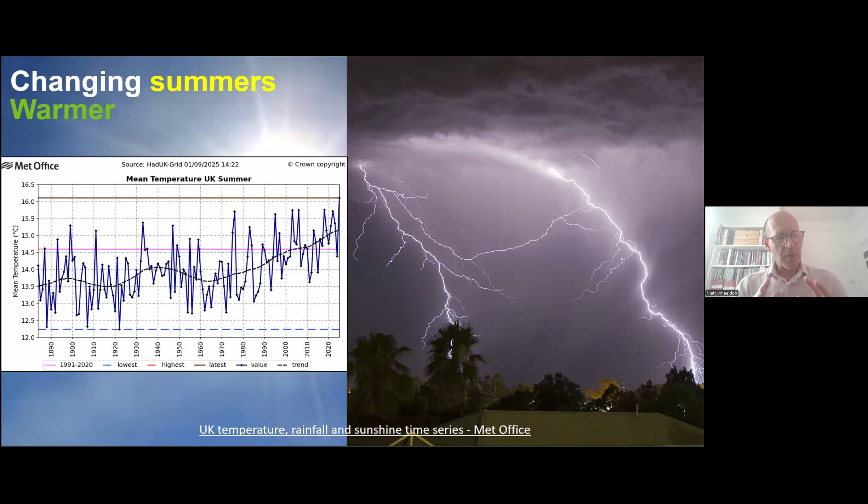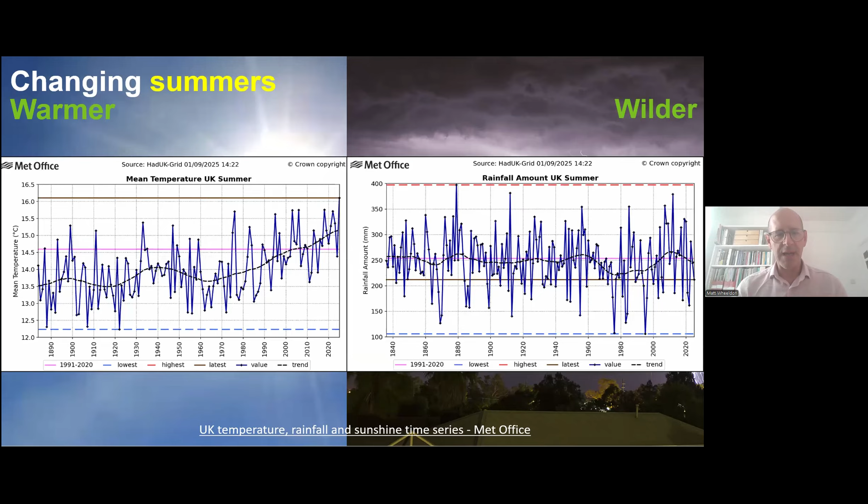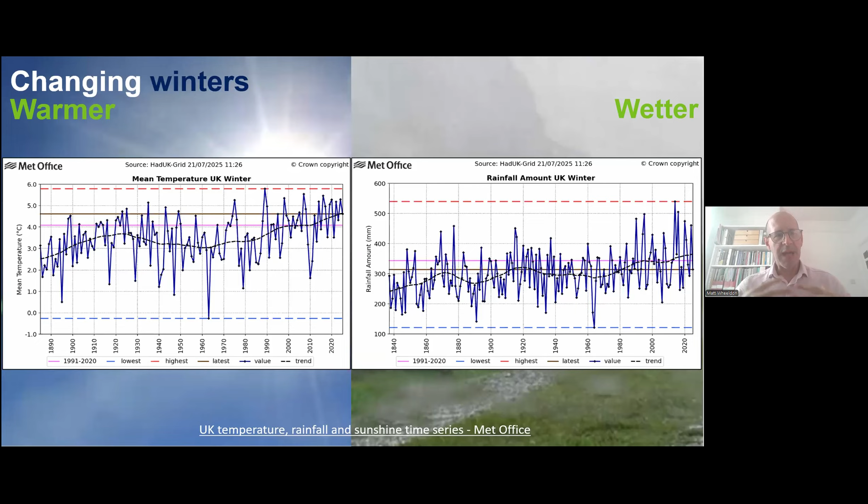Now, a warmer summer doesn't necessarily mean a wetter summer, but it does mean a wilder summer. So the actual amount of rainfall in the summer is not necessarily increasing, but when it does rain, boy, does it rain much harder. And that's typical of a more tropical climate. Our winters are also getting warmer, and they are getting much wetter. And if we add summer, winter, spring, and autumn together, it looks a bit like this. So over the past 50 years, the mean temperature in the UK has increased by 1.4 degrees.

There's a thing called the Clausius-Clapeyron relationship, which talks about the relationship between air temperature and the amount of moisture it can contain. And it says that every 1 degree the atmosphere warms, it can hold 6 to 7% more moisture. And that's exactly what we've seen. Over the past 50 years, rainfall has increased by about 150 millimetres on average across the UK. So we're getting warmer years, we're getting wilder summers, we're getting wetter winters.

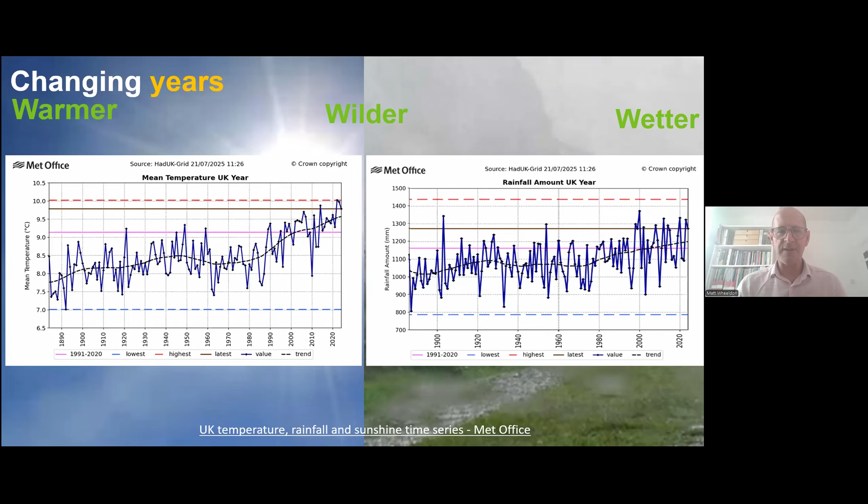So how we manage rain has got to change, because we're moving from a climate of drizzle to one of drought and then deluge. And so the assets that we build now, when we build new homes, have to reflect what the climate is going to be like in another 50 years. And if you look at the rate of change of those graphs in front of you and you project forward another 50 years, we're going to be in a very, very different environment. Not only because the climate is changing, but because we're also intervening with the climate through development.

And you're probably aware of the housing growth targets for both Dorset and BCP. Human beings need to live under things that are impermeable. However, what happens to that runoff is really, really important, and not always particularly well managed, which I'll come on to in a bit. So here's the crazy thing.

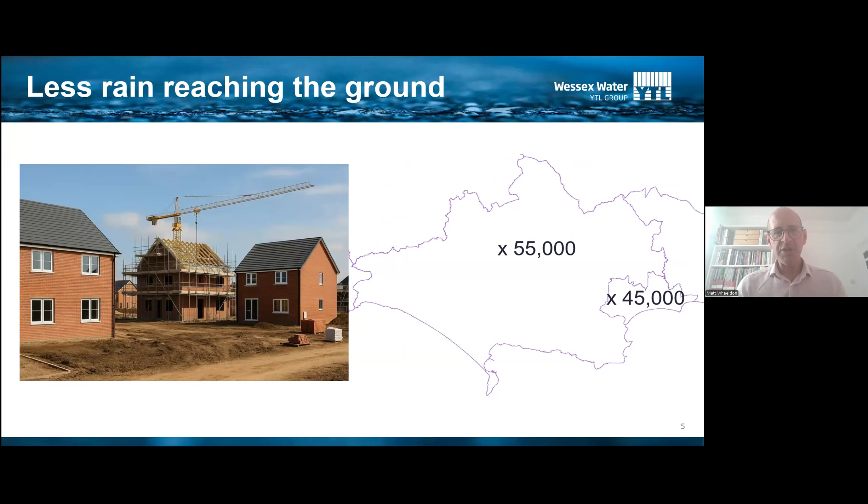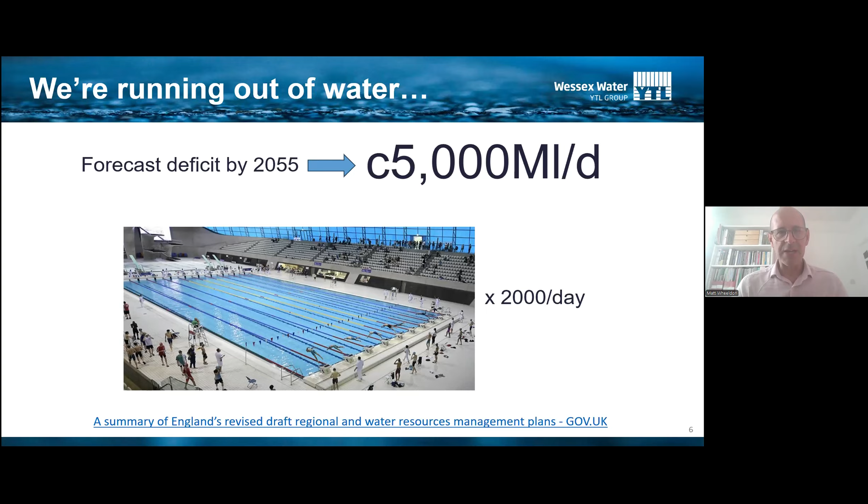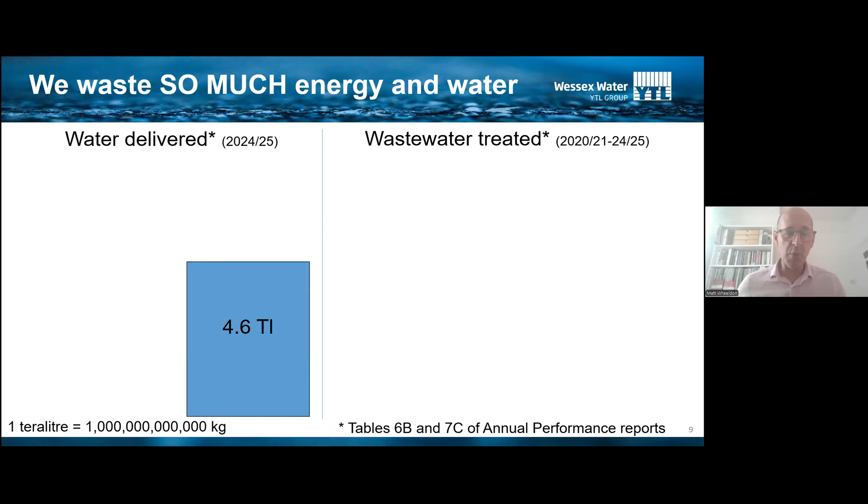In England last year, we supplied 4.6 cubic kilometres of drinking water to our customers. Now, you probably don't hear about cubic kilometres much. We don't generally work in teralitres, but a teralitre is 1,000 billion kilograms. That's quite heavy. It's even heavier when you have to lift it about 100 meters in the air. And that's roughly what we're doing to get the water to your tap. In Wessex, it's about 130 meters to get the water from the source to your tap.

Now, one of the crazy things is about a quarter of that huge amount of energy is wasted, in that we are providing high quality drinking water for non-potable purposes like flushing toilets or watering gardens. If I try and contextualize how much energy that is for a person, that's the equivalent of 1 kilogram, so a bag of sugar, lifted twice the height of Mount Everest per person per day. That's how much energy we put in getting drinking water to your taps and your toilets. That's a huge amount of energy.

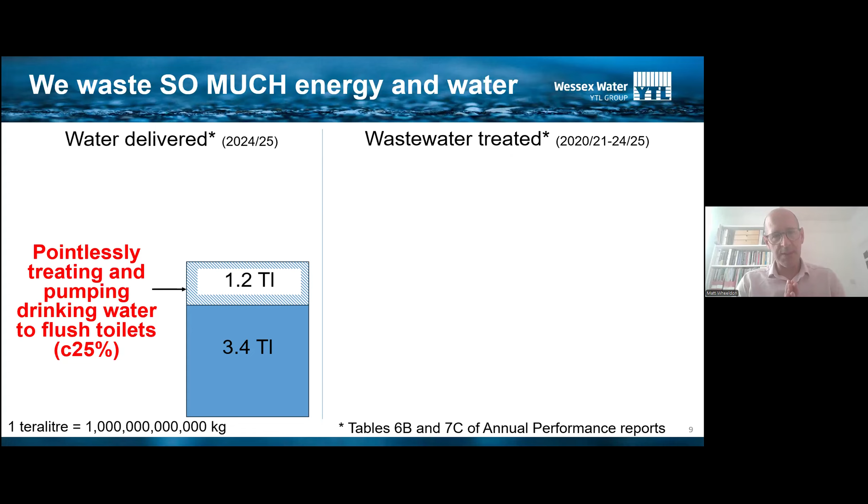On the wastewater side, obviously, we take everything back. And because of the way our system has been built, a lot of rain is also added. About 50 to 80% more liquid on the wastewater side of the business than on the supply side of the business.

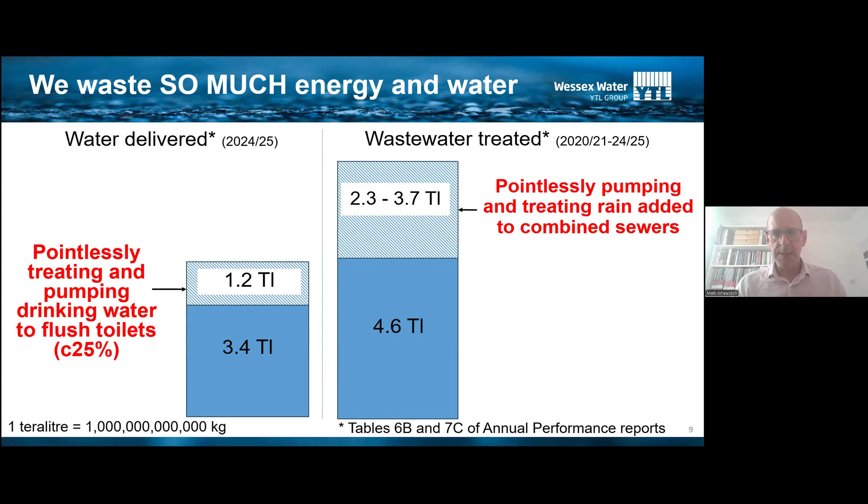These are England figures, by the way, not Wessex Water figures. And that's completely pointless, treating all this extra rain that has been added to the combined sewers. We're not really focused on where the problem is. The problem is the way our homes have been built and are being built. We fill our toilet systems with drinking water and we add rain to sewage.

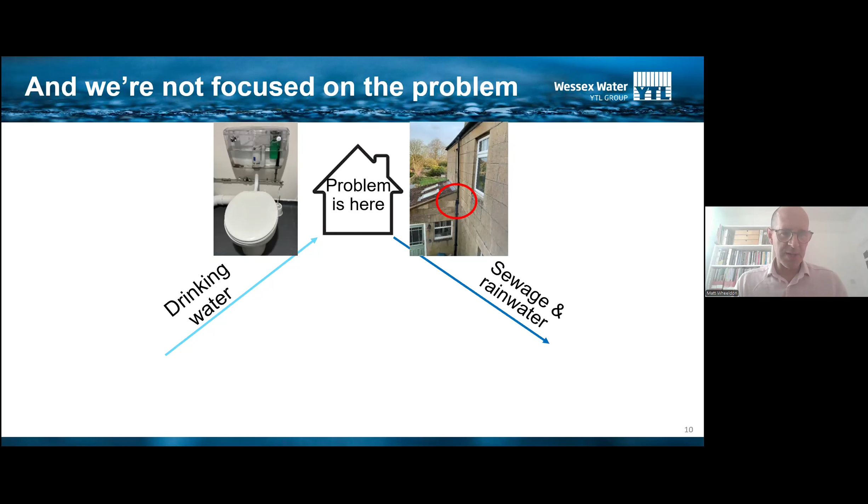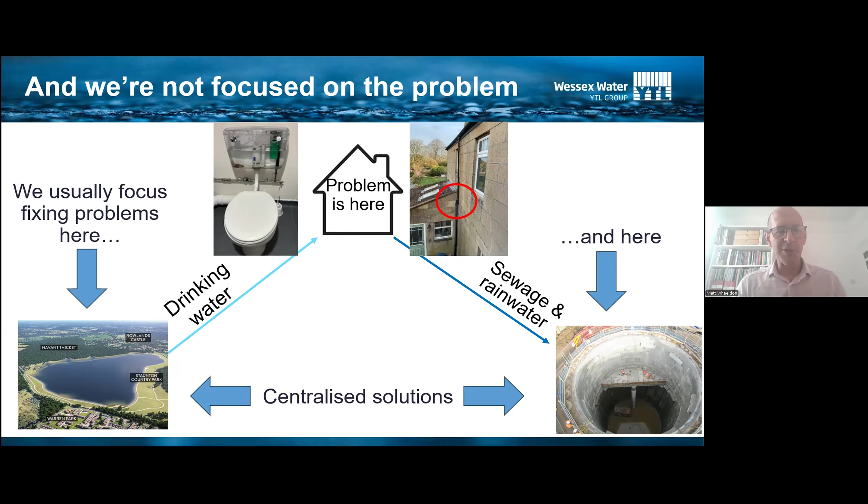And one of the things that I'm trying to point out to people is that the solutions that are typical to try and address running out of water and having too much rain are centralized solutions. So people focus on building big reservoirs, there's lots going, strategic resource options, and also focus on too much water in the sewers by building huge storage tanks. Now, these centralized solutions mean that we end up storing, treating, pumping and treating more. And centralized solutions have a massive, massive energy cost.

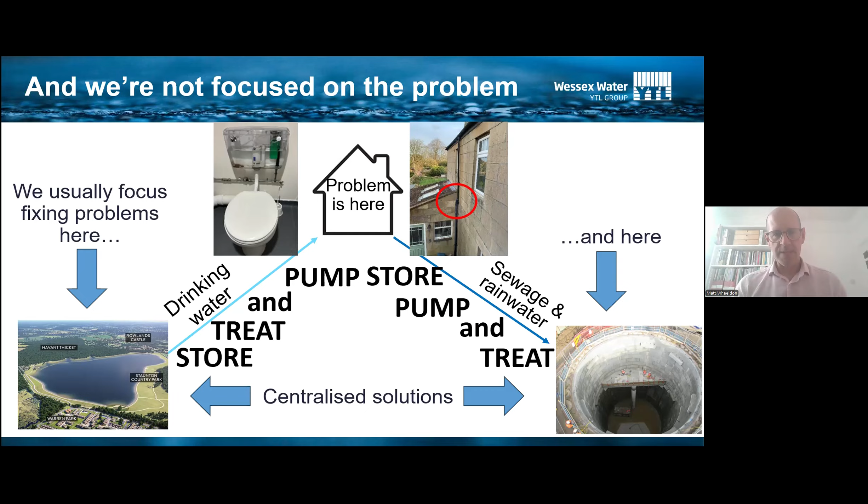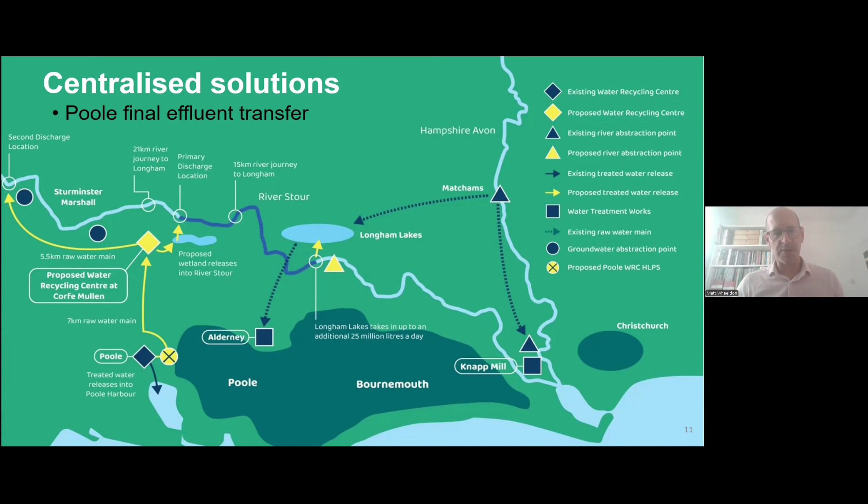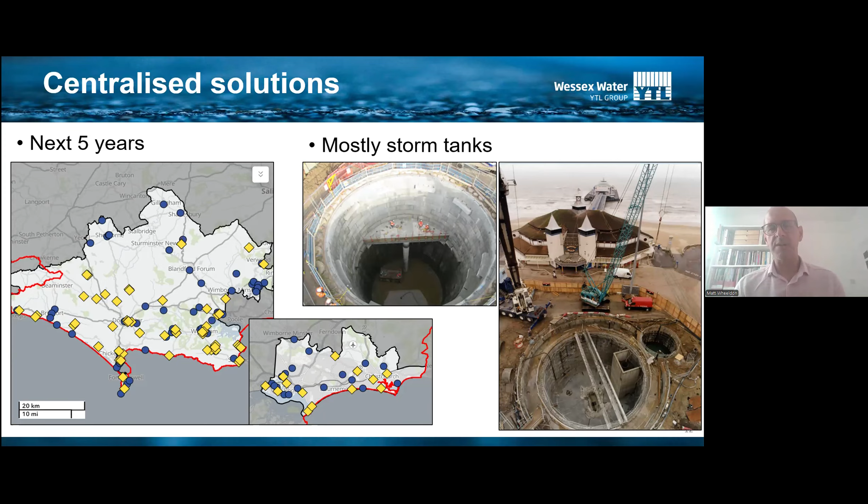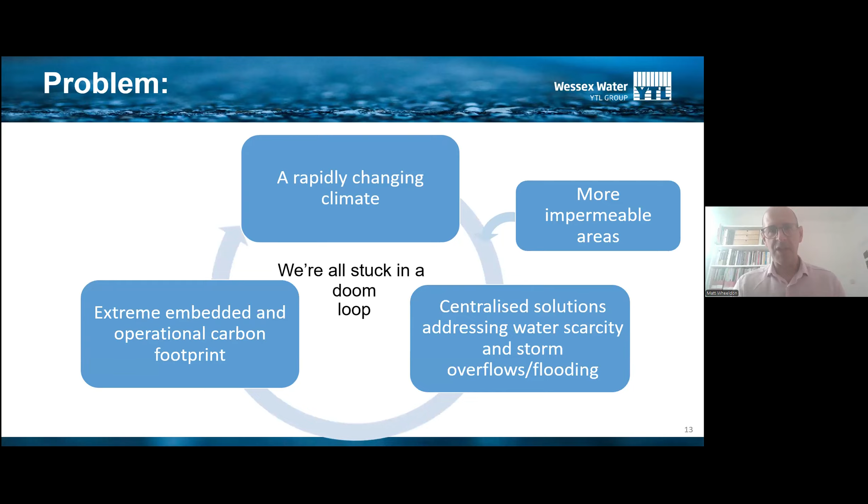Now, the problem we are building is we're stuck in this doom loop of a rapidly changing climate, more impermeable areas being built, centralized solutions to address water scarcity and storm overflows and flooding, which all have extreme embedded and operational carbon footprints, creating a rapidly changing climate. So the $64 million question is this: how can 100,000 new properties in Dorset and BCP be more sustainable? Well, the answer actually is quite straightforward if we harness and mimic nature.

And to do that, there are two simple principles that are documented in a document that DEFRA have written, which are called the Rainwater Management Principles. And these are really quite straightforward. Rain is first and foremost a resource. We should capture it near where it lands and use it where possible. We don't. We build homes that don't do that. Rainwater should be returned to the environment as close to where it landed as possible and never mix with sewage.

Historically, we haven't done that. And even today, we don't put it close to where it landed. It doesn't get mixed with sewage by developers anymore, well, in most cases, but we don't necessarily put it as close to where it landed. In simple words, we need to manage rain better where it lands.

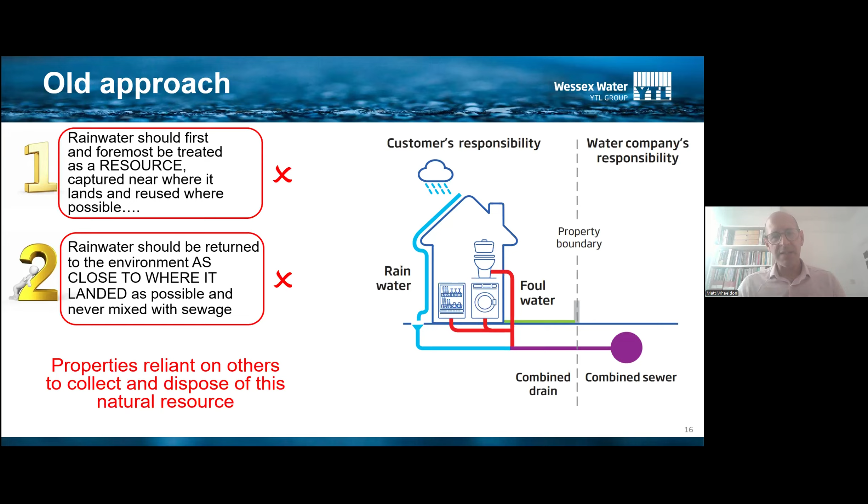So if we look at how about half of the properties in England are built, you can see the two principles on the left-hand side with big red X's. We don't copy those principles. Properties are reliant on others to collect and dispose of this natural resource called rain. There are only very few organisations that collect the rain, but the rain lands on all of us. And so we've basically relied on buying a service in when nature is providing a lot of that service that we could use.

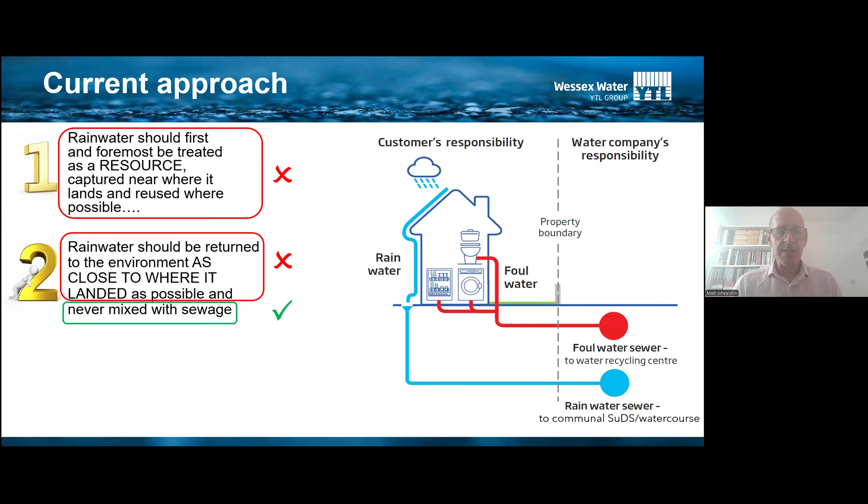The current approach is fractionally better. It doesn't get mixed with sewage, although developers still have a right to connect. We refuse and generally win, but we don't often return it right next to where it landed. You're probably familiar with communal SuDS, sustainable drainage systems. New development often moves that rain away from the property to the corner of the development where they build an attenuation pond, which is often fenced in. Often no one then maintains it. It's not passed over to the water company to maintain.

And it's kind of missing the point, really, in that moving rain away from where it would go naturally isn't mimicking nature. So we could do things better, and quite simply we could do things better by actually looking at rain as a resource that lands on our properties. Enough rain lands on an average roof to supply all of that property's non-potable demands all year. Now, we don't have the infrastructure to do that with existing properties, but we could do that with new properties.

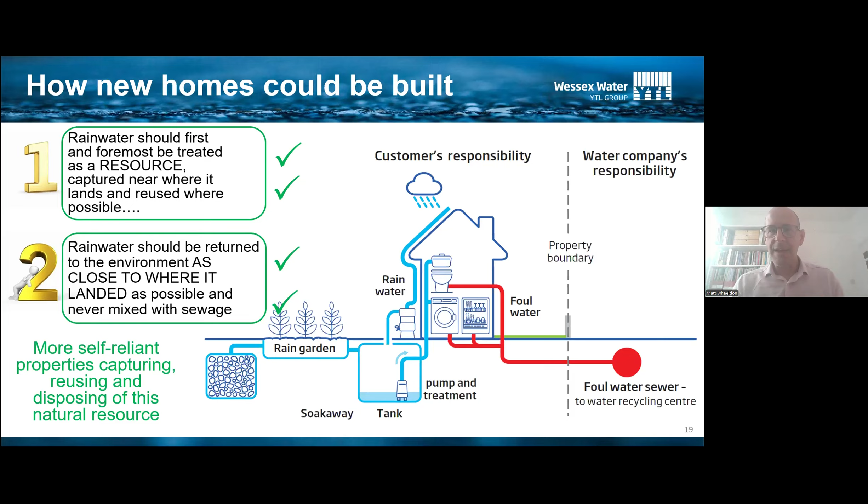own garden. So then what we do is we move to a housing stock that is more self-reliant on the rain that lands on it and uses our drinking water and uses our wastewater system a lot less, and we'd be delighted. So why aren't developers building water assets that are fit for a future climate? Well, two reasons: they don't have to, and two, their base costs will increase.

So some ideas: how do we tackle that? We can make them, rather government could make them by mandating rainwater harvesting for new build, as they have done in Belgium, mandating sustainable drainage systems for new build. So they could mandate that, following the hierarchy of rainwater management, sustainable drainage systems need to be built at property level, if at all possible.

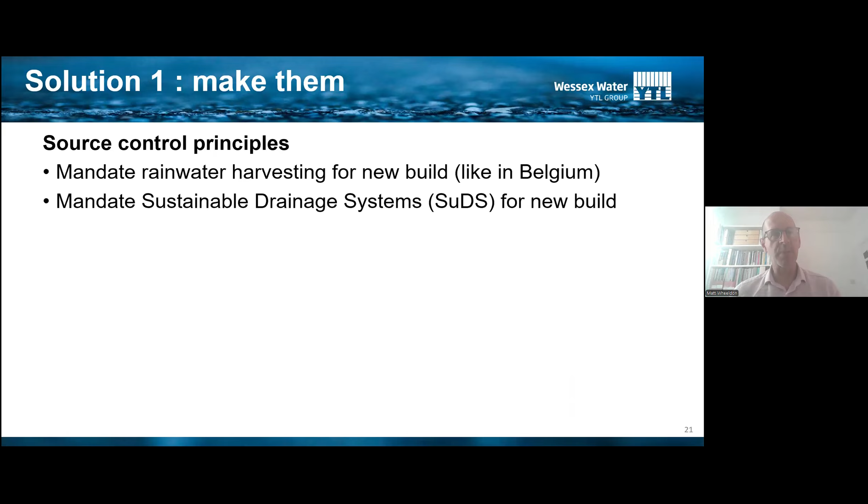And then there are a number of other things which I'm going to probably skip over because they're quite techy, that would help us manage rain better where it lands. The national SUDs standards, which came out last July, have a great hierarchy in that they're not SUDs standards anymore. They are rainwater management standards, because the first in the hierarchy says collect rain for non-potable use. But the problem is that these national standards are non-statutory guidance. So until it's put on a mandatory footing, it's very difficult for local authorities, who all generally want the same thing, to actually make it happen.

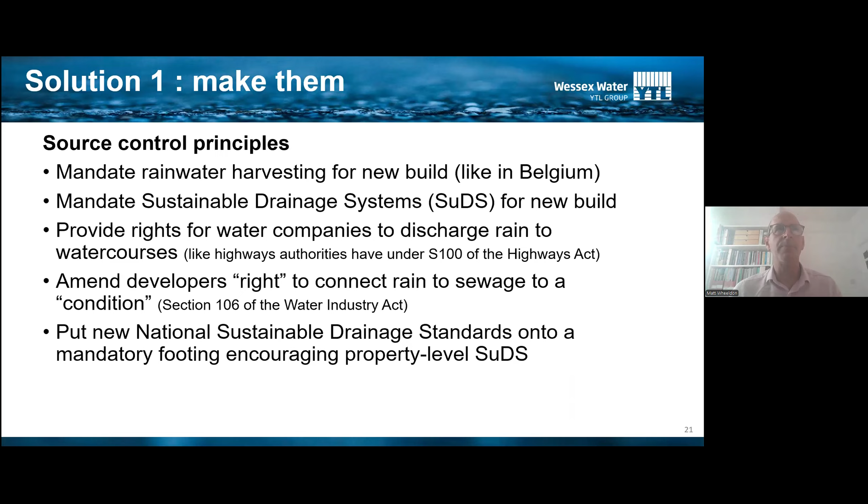The second way of doing it is to incentivize developers. Now, there's been an attempt by water companies to do this through environmental incentive payments. So that is reducing the cost for development to connect to the network by encouraging more water efficient homes, more sustainably drained homes. The problem we've got is that the incentive payments are not big enough to cover the additional costs. And if you go any bigger and actually make it worth their while, then who ends up paying? The existing customers. So it becomes a cross subsidy.

I don't think... that's what happens in energy. A large part of your standing charge goes into a central pot where others can then utilize that grant funding to put solar panels on their roofs. We haven't yet moved to that process in water, but I think maybe we need to.

Let me summarize. The concept is catching on. DEFRA certainly get it. They are now actively talking about managing rain where it lands, which is great because they're seeing the value of rain and the locality of where it gets returned. There is national research going on to help DEFRA with better policy decisions, and this is the exam question that is currently being asked: what is the evidence that managing rain better where it lands for both new and retrofitting development is better economically for society and the environment than centralised solutions?

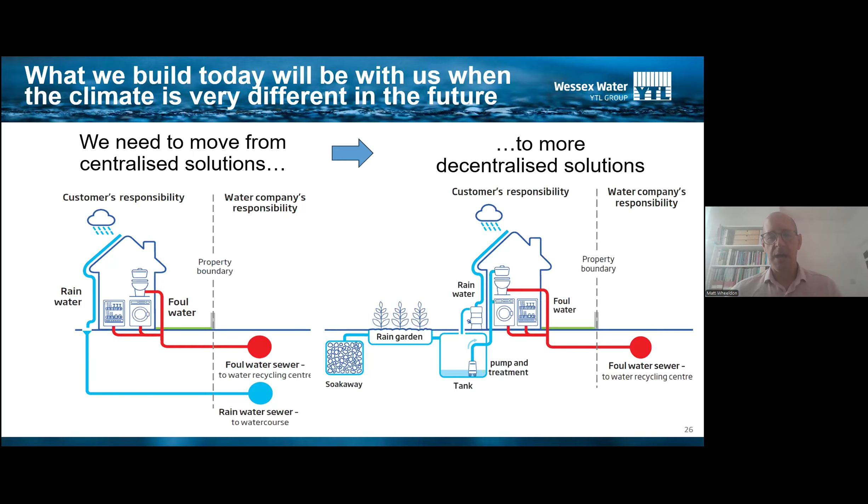In Germany, the German Federal Water Act puts a duty on every person to conserve water that lands on their property and to not accelerate runoff from their property. What a great idea, giving people responsibility for the natural resource that lands on them and encouraging them to use it. A few catchphrases for you to take away.

Manage rain better where it lands. This is a phrase, six words, that is really getting through to the top of government. Do repeat it. It gets away from using tech language like integrated systems and holistic, which are words that people often use, but a lot of people don't understand. The two principles are all about harnessing nature and mimicking nature. Harnessing nature for use, mimicking nature for returning it.

Keep raindrops lonely. Don't let them meet their friends. We have problems when properties are built at the bottom of hills, not because they flood themselves, but because they're flooded by the people upstream. So we've just got to remember that rain flows downhill, and building stuff at the bottom of the hill is not a very sensible thing. And then as I work for a water company, my last takeaway soundbite is this: we want your poo, but please keep and use